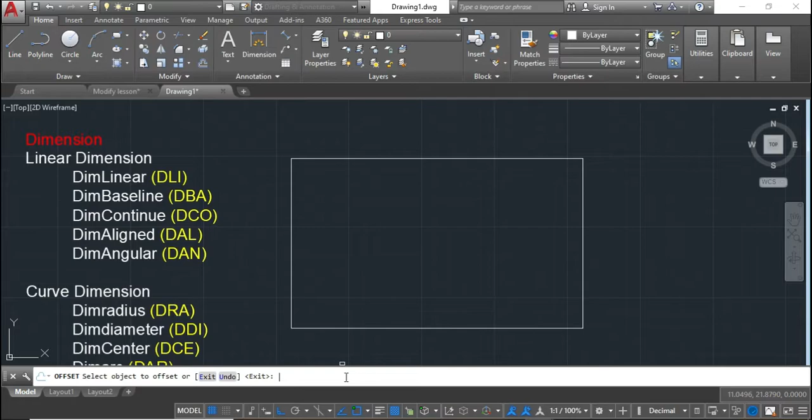Same with sa ating horizontal. Unahin natin yung dim linear. Si dim linear, malalagyan niya ng dimension yung vertical and horizontal line natin. Shortcut command, DLI, o dito sa ating annotation panel, linear. Specify first extension line or select object, first point. Make sure nyo na naka-turn on o naka-check yung ating endpoint para ma-detect natin yung endpoint ng ating object. DLI.

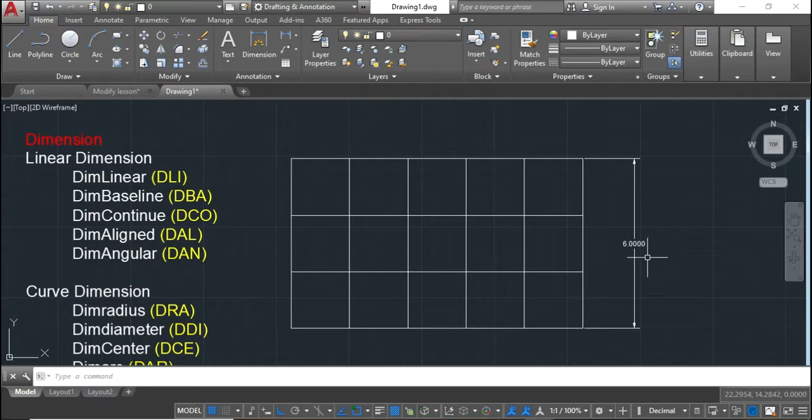Okay, so yung ating dimension, pwede yung ma-edit. Paano ma-edit yan? Click nyo yung ating dimension, then right click, then properties. Makikita nyo sa ating properties yung mga miscellaneous, line and arrows, text with primary units, kung saan pwede natin i-edit yung ating dimension.

Okay, unahin natin sa line and arrow. Pag click nyo yan, yung arrow size pwede nyo i-edit kung gusto nyo. Yung arrow number 1 and arrow number 2, pwede kayong mamili kung anong preferred nyo na arrow - pwedeng architectural, tick, dot, close, or open. Then yung arrow 2, same din. Arrow size, preferred mong mas malaki, pwede rin ma-adjust yan.

Then yung kanyang extension line and extension line offset, nababago din yun. Regarding sa text natin, kung gusto mong mabago ang text height, nababago rin yan. Ang text offset, na-adjust din. The same time, yung ating text rotation.

Halimbawa, gusto mong rotation is 90. Pansin, rotate from 0 to 90. So balik lang natin sa 0. Okay, next.

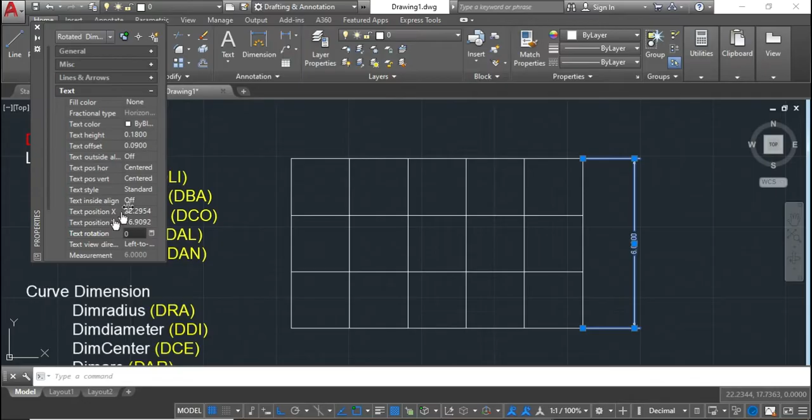Yung ating primary units. Sa primary units, pwede tayong maglagay ng suffix and prefix. The same time, yung separator natin - separator, pwedeng decimal, comma, or space, depende sa'yo kung ano yung preferred mo. Yung prefix, pwede kang maglagay ng prefix dyan, dun sa unahan nung dimension mo. At yung suffix, ito naman yung after ng dimension mo. Halimbawa, gusto mong ilagay dyan yung centimeter, yung kanyang unit.

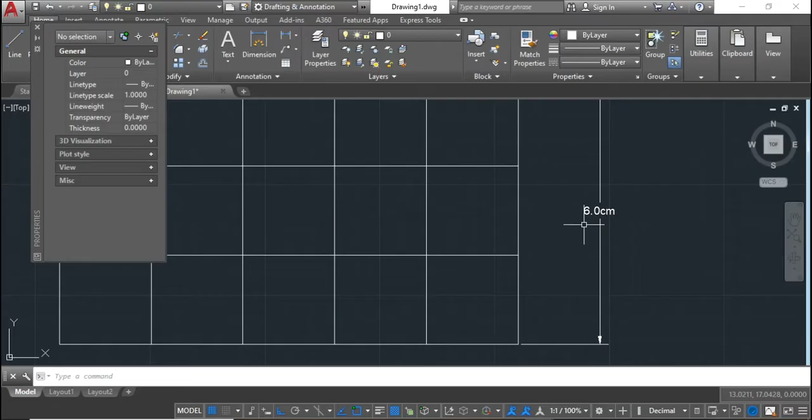Next is yung ating precision. Kung papansinin nyo, 4 na 0 yan, so pwedeng ma-adjust yan - pwedeng isa o wala. May decimal point tayo, 2. Sa case na to, gusto ko is 1 decimal. Then na-adjust yan.

I-click mo lang yan, makikita mo na yung pick box mo, then pwede mong i-adjust kung saan mo gusto. Okay, next is yung ating DBA o dim baseline, shortcut command DBA.

Kung papansinin nyo si dim baseline, from this point kinukuha nyo yung sukat. Mamaya, papakita ko yung difference niya sa DCO, sa dim continue.

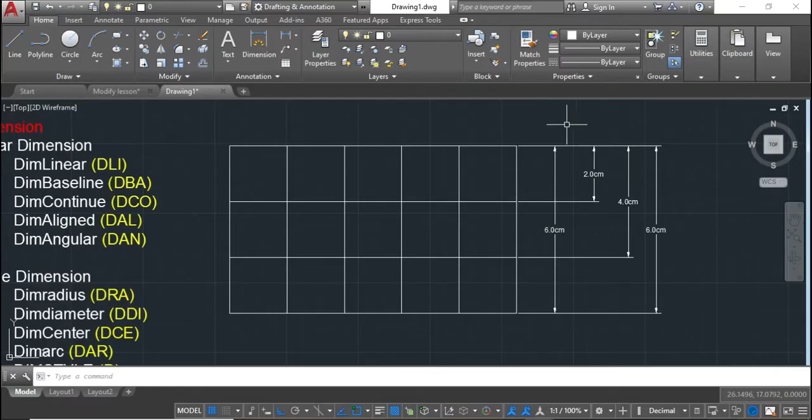Next naman natin yung horizontal. Kanina vertical, ngayon naman horizontal. So ganun pa rin, DLI, first point and second point.

Gawin naman natin yung DCO. Kanina, di ba, DBA, yung dim baseline - yun naman, dim continue, shortcut command is DCO. Then baseline niya, yun.

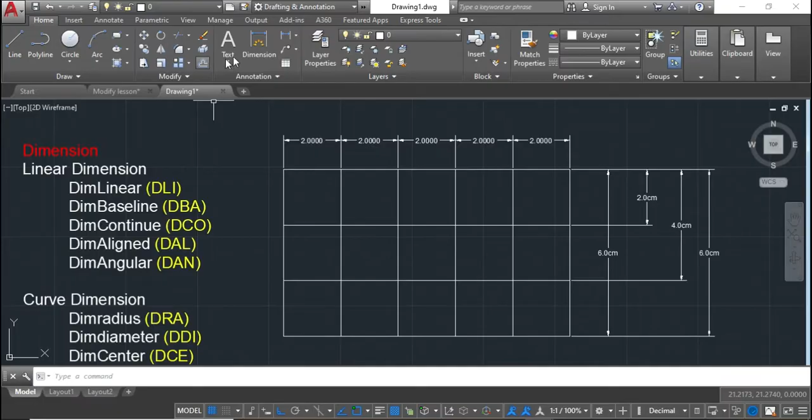Okay, ayan po siya. Next is yung dim align. Si dim align is for align object. So gawa tayo ng align object natin.

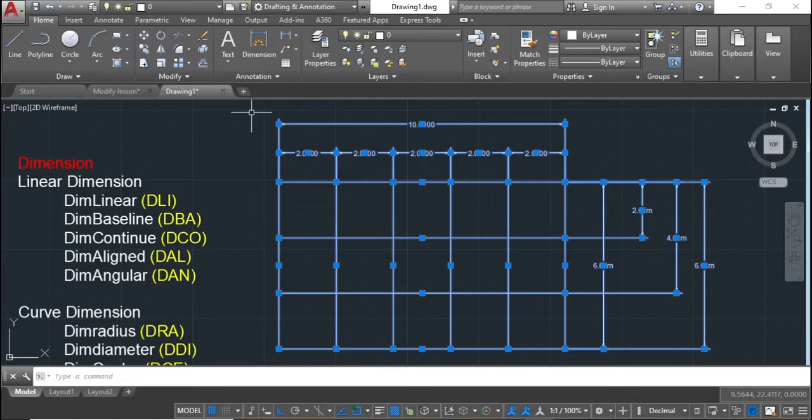So, line. Ang kanyang length is 5, kanyang width is 4. Then, close. So, kukunin natin yung sukat ng hypotenuse o yung align line niya.

Shortcut command, DAL or align. So, first point, second point. Hindi pwedeng ang kukunin nyo dyan, ang gagamitin nyo dyan ay DLI.

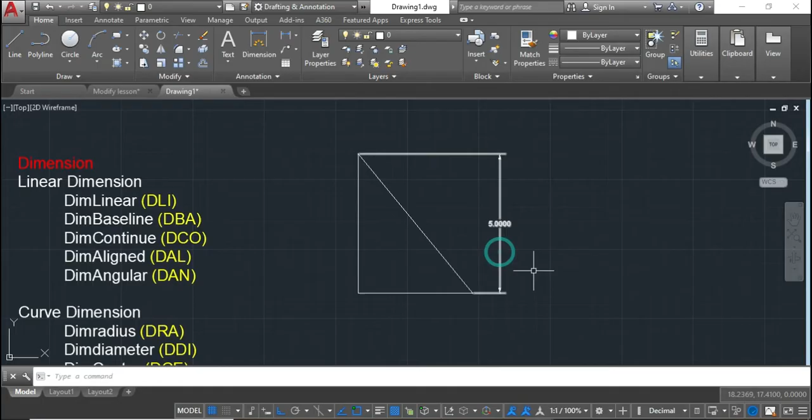Iba po yung lalabas. So, try natin para makita natin yung difference. Pag ito ang kinuha natin, linear, ayan po siya. So, kinuha niya itong sukat na to. Hindi niya kinuha ito. Okay? So, si dim align is for align object.

Next natin is yung dim angular. Pag dim angular, so related na to sa angle. So DAN ang kanyang shortcut command or shortcut key. Ayan. So yung ating first point and second point. Ayan. So this is for angle.

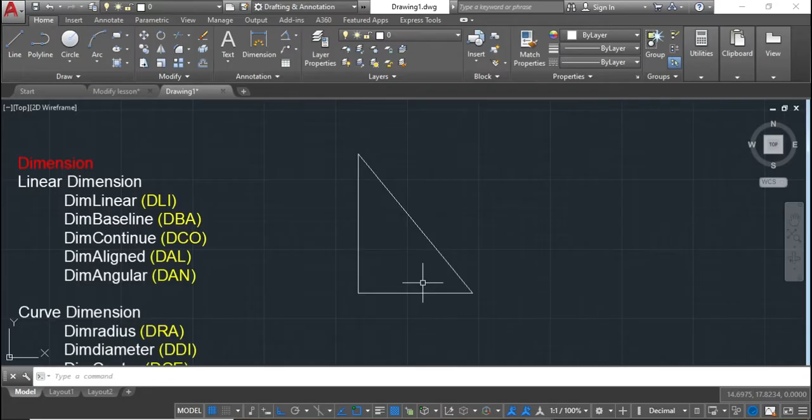Okay? Next naman natin, dimension for curve dimension. So tapos na tayo sa linear. Sa dimension naman tayo. So gawa tayo ng circle, which is ang kanyang radius is 2.5. Okay? So si dim radius is intended for radius only and dim diameter is intended only for diameter.

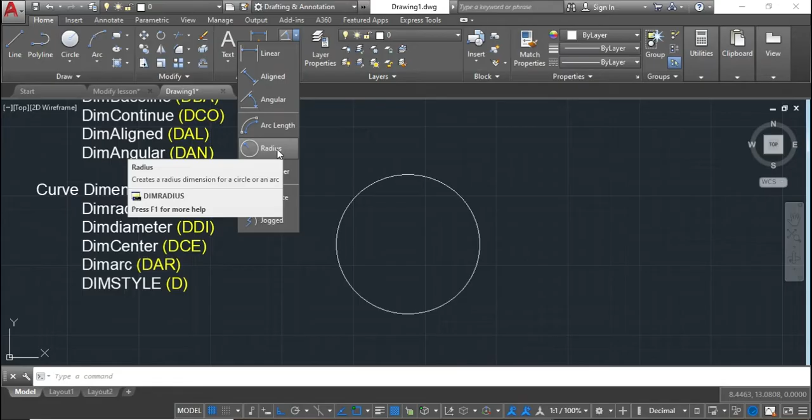So gawin natin. So for radius po, piliin natin yung ating radius icon. Then i-hover natin. So make sure nyo na naka-on ang ating center para ma-detect niya yung ating circle. So radius. Yun. Then ayun na siya.

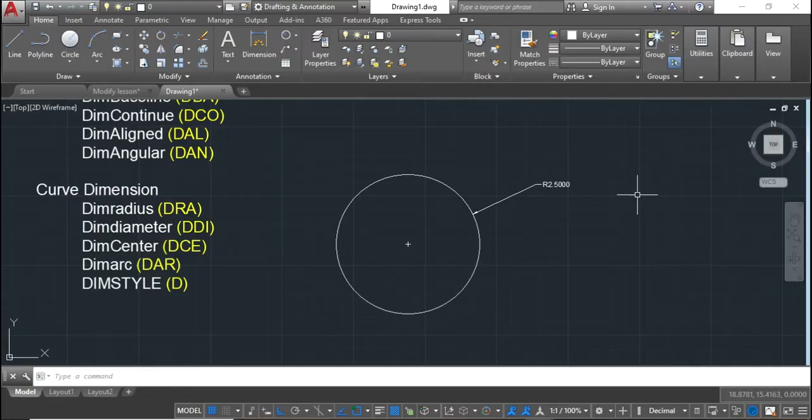And yung ating diameter naman or DDI. Okay? So papansinin nyo, magkaiba sila ng symbol. Pag radius R, kapag diameter is Ø.

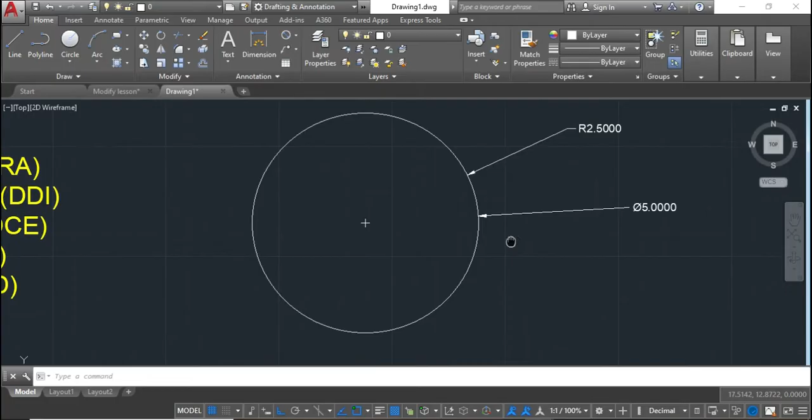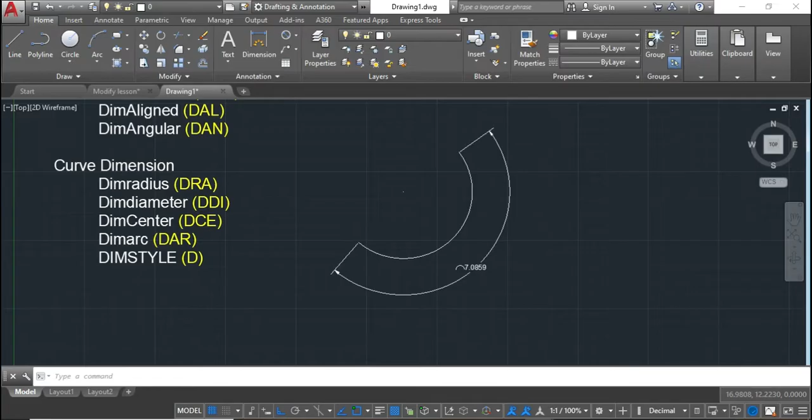Okay? Next, dim arc. So dim arc is for arc. So gawa na muna tayo ng arc. So 1, 2, 3. Okay. So dim arc, DAR, kanyang shortcut key. And then select arc or polyline arc segment. Ayan. So mapapansin nyo, yung kanyang symbol is arc.

Okay. Next is yung ating dim style. Yung dim style is makakagawa ka ng sarili mong style. So depende yan sa project mo or standard na ginagawa mo. For halimbawa, for architectural, for sa product mo, gagawing object mo, kung may scaling ka.

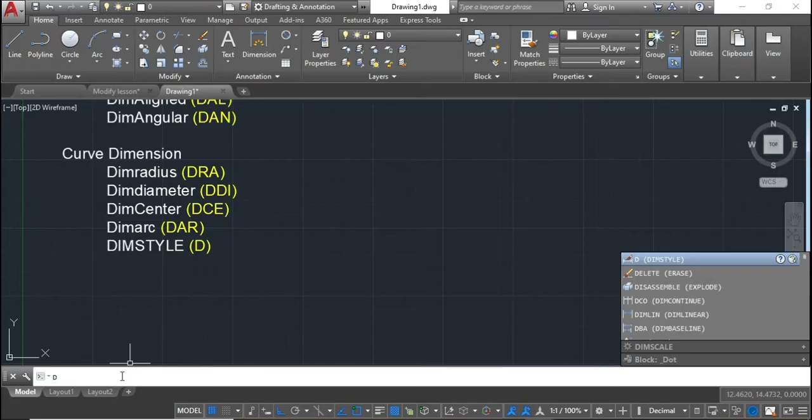Okay. Ito siya. So gagawa ka. So ito siya. So new. Ayan. So continue. So gawa ka ng sarili mong name. So halimbawa is new one.

Then modify, which is pag na-modify mo na yan, makakapag-set ka ng gusto mo na mga measurement regarding sa lines, for the symbols ng arrow mo, kung gusto mo anong gamitin sa arrowhead mo, kung dot, architectural tick, oblique, open, etc. And for arrow size, so na-adjust din yan.

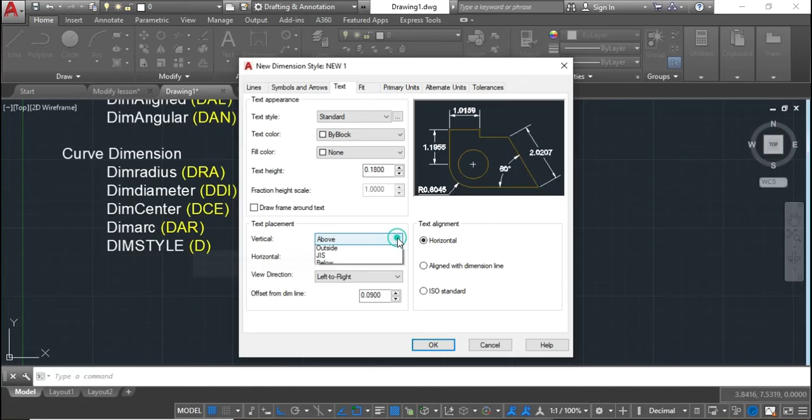Okay. For text, so text height, na-adjust din yan. At the same time, yung color ng iyong text, pwede kang mamili. At the same time, yung text placement nya, yung vertical, so makikita nyo rito, kumbaga napipreview nyo kung ano yung magiging itsura. So pag kinlik nyo yan, above, sa above, or nasa outside, below. Okay. So view direction.

Okay. So then yung fit nya, same time yung primary units, ito yung ginawa natin kanina. So yung unit format nya, kung naka-decimal ba siya, scientific, engineering, architectural, fractional, it's up to you kung ano yung gusto mong unit format. And precision.

So mga decimal natin. So kung gusto mong walang decimal, whole number, pwede din. Okay. So for 1 decimal, 2 decimal, okay. So round off natin. Then separator natin. So kung period, comma, or space, so normally, period, yung ating separator. Okay.

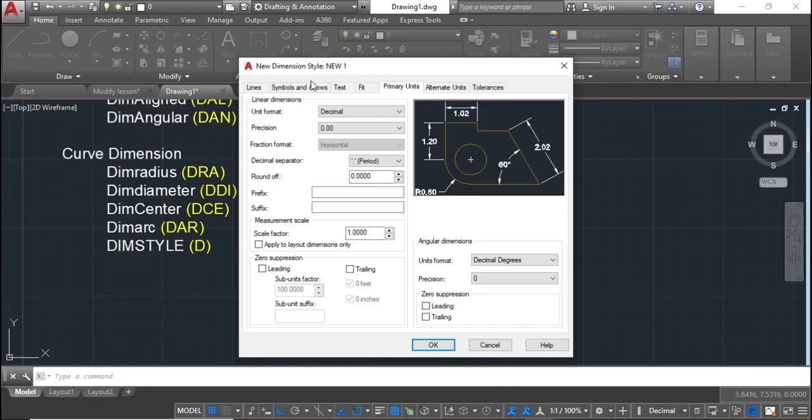Then scale factor, kung ilan ang gusto mong factor. So kung gusto mong by 2, 3, 4, it's up to you kung ano yung gusto mo. Okay. So ayan po yung ating dim style, kung paano ka mapag-create ng bago mong dim style. Okay.

So that's all po ang ating lesson for dimensioning. So, thank you.